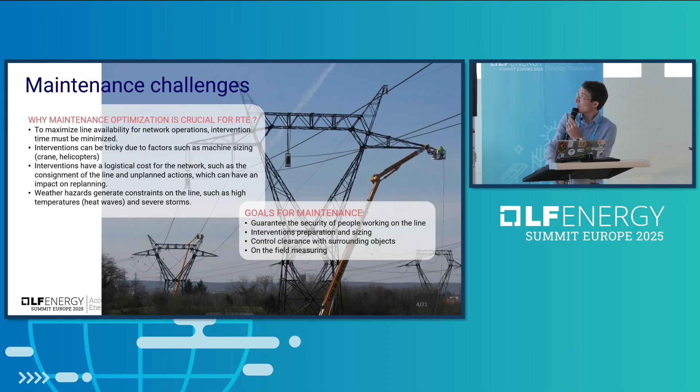So now here are the challenges. Perhaps let's do physics now. What is the impact of cable temperature? And why do we have to deal with cable temperature? In fact, here there is a line with three spans. So if I have a little more wind, the line goes up in that specific span. If it's getting warmer, the line is lowering. And this is the same with solar heating and transit.

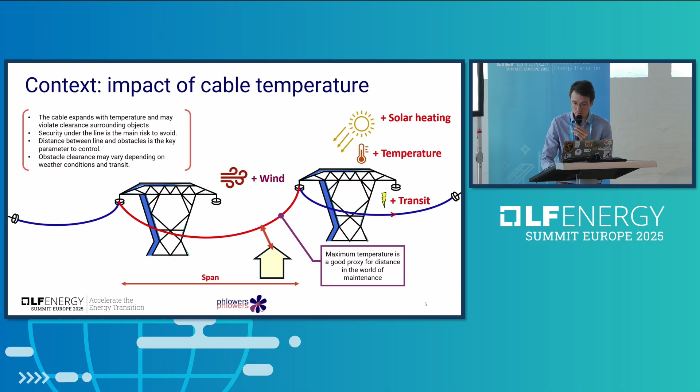So the problem is if I have objects surrounding the line, the cable can expand with weather change and may violate clearance with surrounding objects. So the interesting thing is that, in fact, maximum temperature is a good proxy for distance in the world of maintenance. So now I know the cable temperature, and I want to make some mechanical computation.

We can compute geometrical position or clearance. Let's imagine that this object here is too close to the line. So here are some example use cases. We can do tensioning on the span, but we have to calculate the length to pull the section. In fact, we are not pulling here, but it was too difficult to do that.

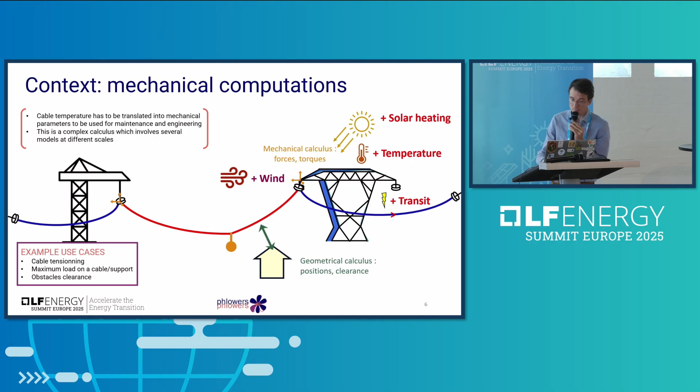Another use case is the load I can put on the cable. So we have to make calculations to have access to forces or torques on the hanging point of the cable or on the pylon. And the last one is I want to change my support, so I have to dimension a crane to do that. So I have to know the force that the crane is able to hold.

So that's why we initiated Phlowers. Phlowers is a GitHub organization, and this is a collection of open source tools for physical studies on power lines. Phlowers has two parts. The libraries part, where there are two libraries, one dealing with mechanical issues, and the other with thermal issues.

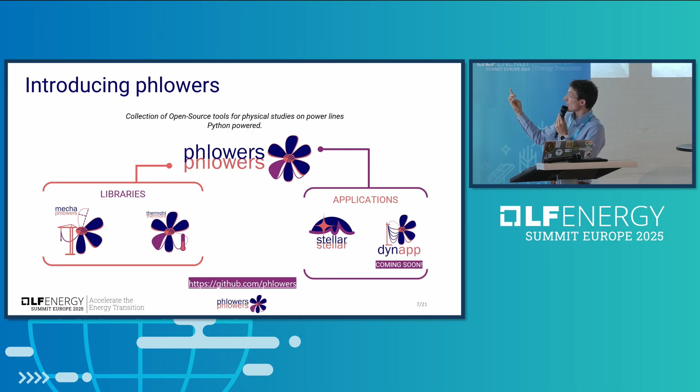And the other part is an application part, where you can find Stellar, an application based on Mechaphlowers, and Dynapp, which is not actually in the repository. You can go to GitHub. But this is an application based on Thermohl, which is the thermal part.

So perhaps the question could be why Phlowers is open source. In fact, you've heard perhaps at other talks that open source is in RTE's DNA, and we started mainly with power system tools, and now we have challenges in asset management. So we are trying to do the same things.

Another point is that asset management is late on OSS tools. So here we want to offer a transparent and controlled algorithm. We know because we use commercial software, and they are hard to use, especially for on-the-field people, who have not the time, and they prefer to go on the line than to perform complex studies on the computer.

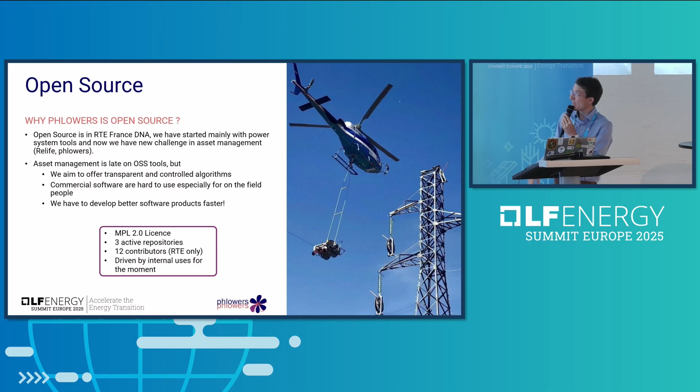So that's the reason we want to make it open source, and there are 3 active repositories, RTE is the only contributor for the moment, and it is driven by internal uses for the moment.

So let's dive into the stack of the libraries. We chose a very classical stack because this is about scientific packages. So we chose a SciPy stack with a core in pure NumPy to get C performance. The libraries are open for additional models or solvers because we have rules, but we know that every TSO or DSO has perhaps others.

We make the user input customizable for users' data. And we try to have an API easy to use for notebooks. So one specific point is that we wanted to use Python in the browser to have offline applications. So those libraries are Pyodide compatible. Pyodide is a framework to allow executing Python in front-end code.

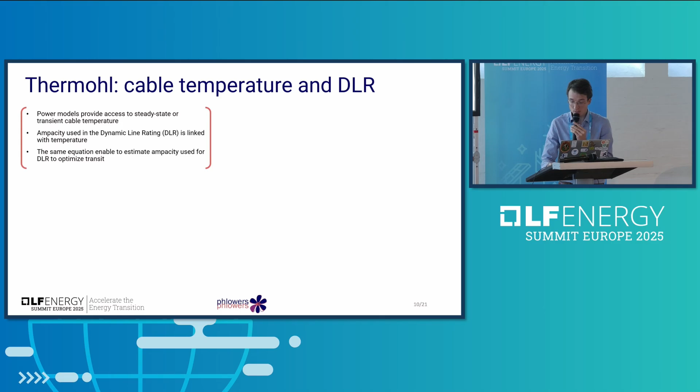So first, I will introduce ThermoHL. You know perhaps about DLR. Here, these are the same equations as DLR. This is a classical power model. So if you have wind, temperature, solar heating, transit, and the line parameters, you can have access to the cable temperature. If you reverse the equation, you can put the maximum temperature as input and have the maximum transit as output, which is also called ampacity.

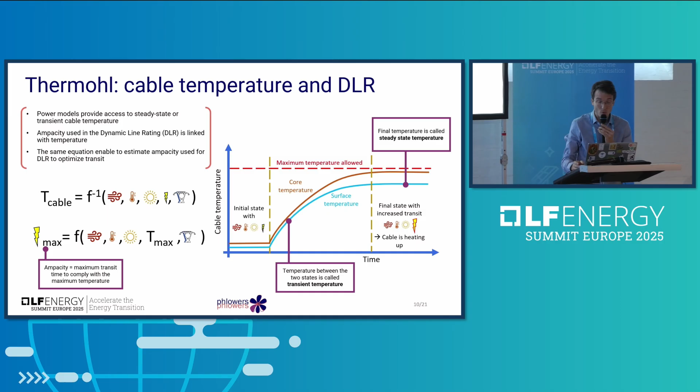So our package is able to perform cable temperature calculation, but also ampacity calculations. In fact, there are several states in the cable behavior, and we can compute a transient state or steady state. We also have models dealing with multi-temperature inside the cable, so we can access surface temperature or core temperature or perhaps others in upcoming models.

So previously, it was an R&D project. It was industrialized in 2021 as part of our DLR project. After, it was an internal common software with an R wrapper, and it was used behind several studies or processes. So the interesting part here, the open part, is that we have 4 models inside, but it's open to additional ones. We have 2 different equations, and it's also open to additional ones.

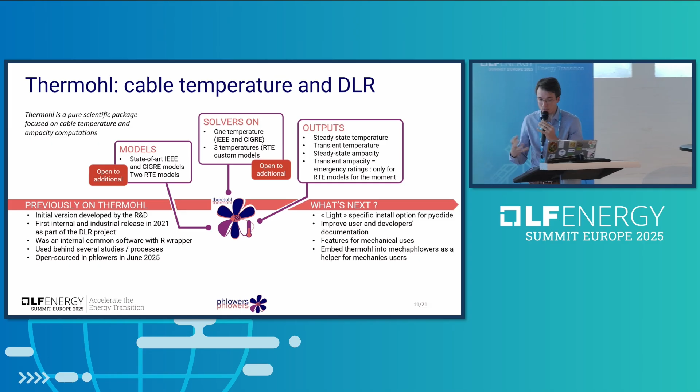So what's next? The roadmap here. In fact, we open sourced recently, but this is a product we have been using for 4 or 5 years. So next, we don't have a roadmap with very big steps. So all small steps, in fact.

Let's talk about the Mechaphlowers package. Here, this is slightly different because there is a core scientific package inside, but we wanted to add a data management layer and also to have visualization tools inside and to be user-friendly for the API, because the goal we want is that Mechaphlowers has to be the user's flagship for line data exploration.

What we have here are the different main parts we are building, because we started Mechaphlowers in January this year, and we target a beta version in January next year. The interesting part on those blocks is that the multi-scale models are open to additional ones. The user API is designed to be notebook ready. All the data parts can be easily customized to fit the user's data. And we are dealing with a lot of features used internally.

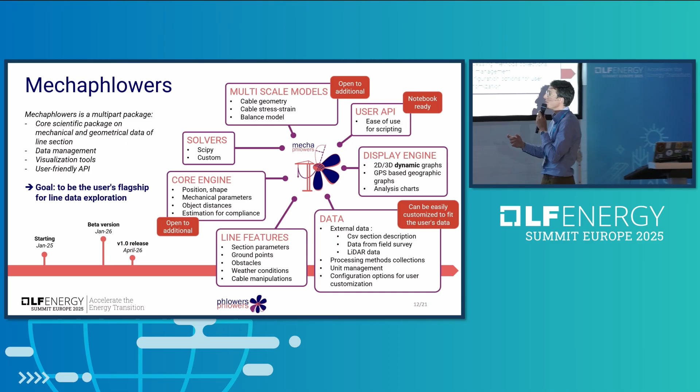So we are dealing with section parameters. You can put some ground points, some obstacles of several types. You can change state with changing weather conditions, but also you can perform cable manipulations.

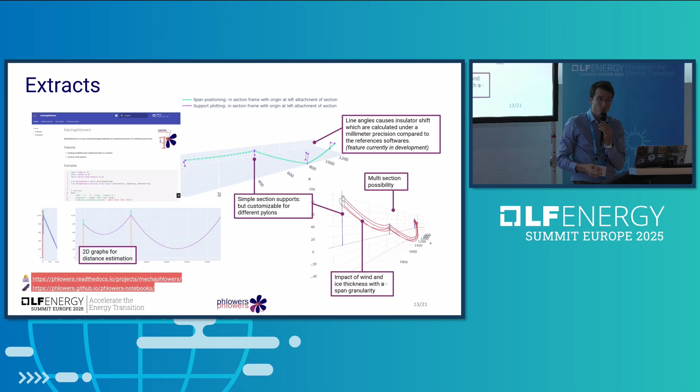So some extracts. We have a doc on Read the Docs. You can also try on phlowers.github.io/phlowers-notebooks if you want, and those are extracts of those notebooks. So an interesting thing here, you can see that we can do multi-section visualization and calculus. And you can see here, for example, state change with wind input by span.

So now we've seen the libraries. Let's dive into the application. So Stellar is basically an application based on Phlowers. And the goal of this tool is to be the reference tool for maintenance operations. So this is a simulation tool of sections with obstacles, ground, climatic conditions, cable manipulation.

And the idea here is that this is a complex computation. Data is complex, but we want this software to be easy to manipulate. So Stellar users are on-the-field people for construction preparations, on-site verification, or they can perform studies for different users and potentially expert users. Stellar is built on top of our experience returns from users on internal software over a long time.

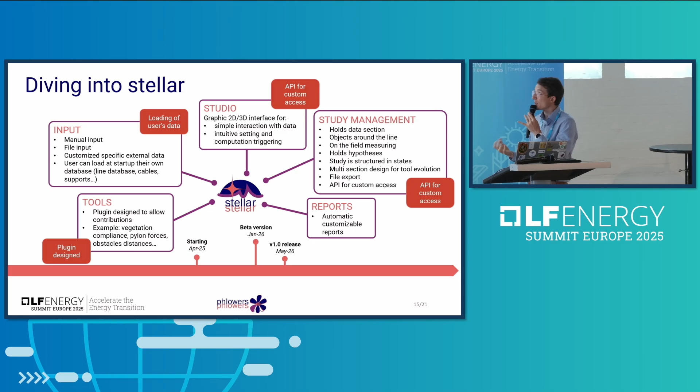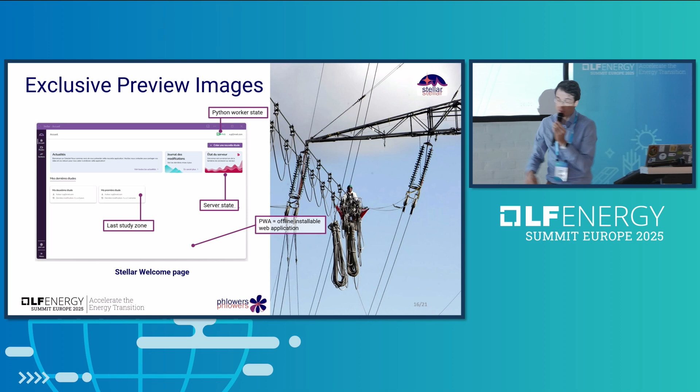Some exclusive preview images. Some people in RTE never saw these images. So here's the Stellar welcome page. Here are images from the section study explorer, the studio. You have navigation options here, the tools plugin zones, the state; you can change state with those tabs. You have a 3D view, and all the graphs are dynamic. In practice we are based on Plotly, which is a package providing those dynamic graphs.

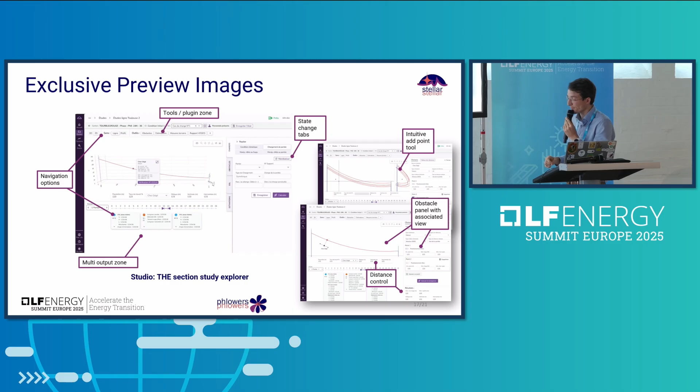So last but not least, an overview of the dynapp application. This one is not the same as the others, which are currently in active development. The goal of dynapp is to provide cable temperature data for past weather, short or medium-term weather, and long-term climate evolution. So here the users are very different: grid operation, maintenance, grid development, expertise.

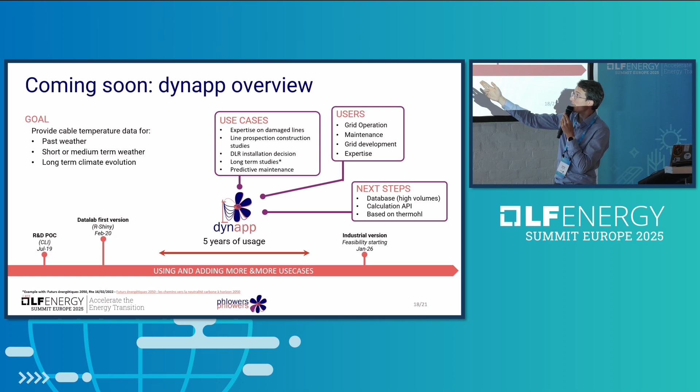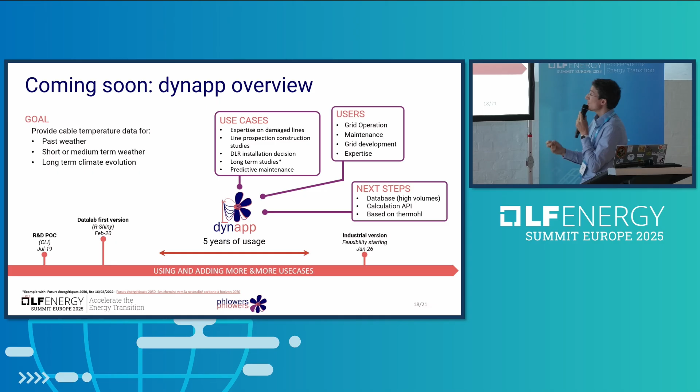This is a little specific because we released a Data Lab first version internally in 2020, and we already have 5 years of usage. We added more and more use cases, and now we are launching a new industrial version, with a feasibility phase in January next year. Why? Because there are some difficult points to solve. This is about weather, so we have to deal with very high volume databases. We want to work on a calculation API system, and for the calculus, this is already done with thermohl.

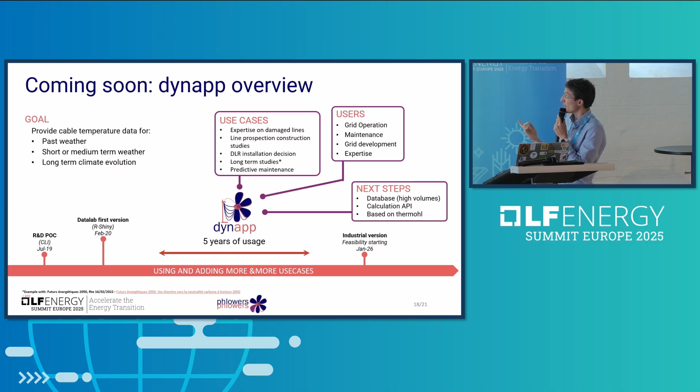So some examples from the Data Lab version, what we are currently doing with that data. First, we can plot dynamic maps with weather and ampacity or cable temperature by span. This is very interesting when you have to analyze a specific situation. We can have access to time series for ampacity or cable temperature, by section or by span.

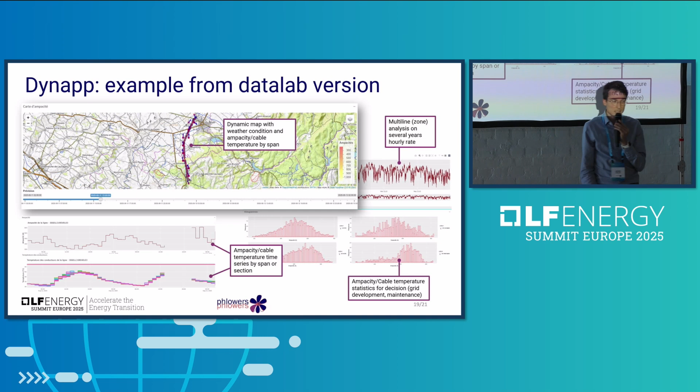And we also have users who want to use it for decisions, and they want to perform statistics on a very high volume of data, several years, for example, with a multi-line analysis on a zone. So those are the different use cases we provide with the Data Lab version.

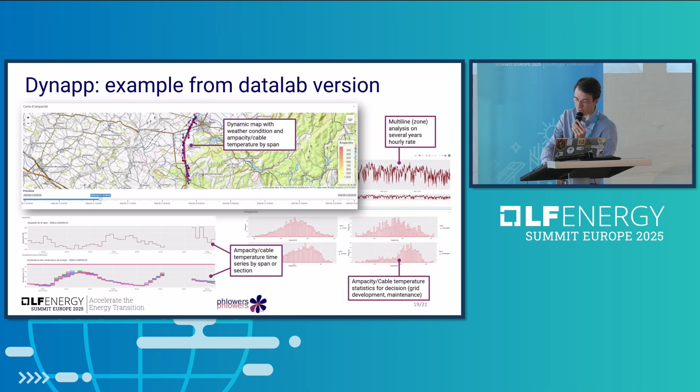So to conclude, Phlowers is a collection of open source tools for physical studies on power lines. We are actively developing it. We want to help asset management and maintenance with open source tools. And with Phlowers, we are interested in hearing from people who are interested in these themes. For example, do TSOs or DSOs have the same needs as us? So our aim is that Phlowers becomes a collaborative coding hub and a thriving community around power lines.

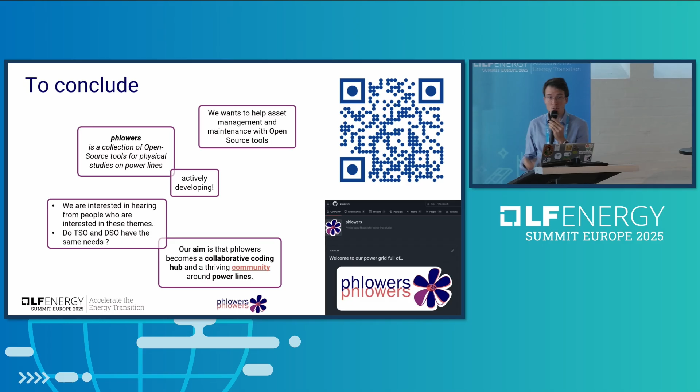Yes. Thanks. I have one question.

Have you validated or do you plan to validate the mechanical and thermal models with field sensor measurements? I mean, the sags can be measured five, six different ways. Temperature sensor: conductor temperature on the surface is easier to measure than the core temperature, but you can still use fiber optics to do that. Do you have plans to do so or have you done it?

Thank you for the question. So in fact, that's not my part because I'm not R&D. But I know for the mechanical parts, we are making comparisons with reference commercial software we use, and we are based on that for the moment. Because when you are in the field, there are some parameters which can affect your measurement. We are targeting to have the same performance as commercial software.

For the thermal part, there are some sensors on some lines, and I know there is some comparison, but I'm not aware of all of it. Thank you.